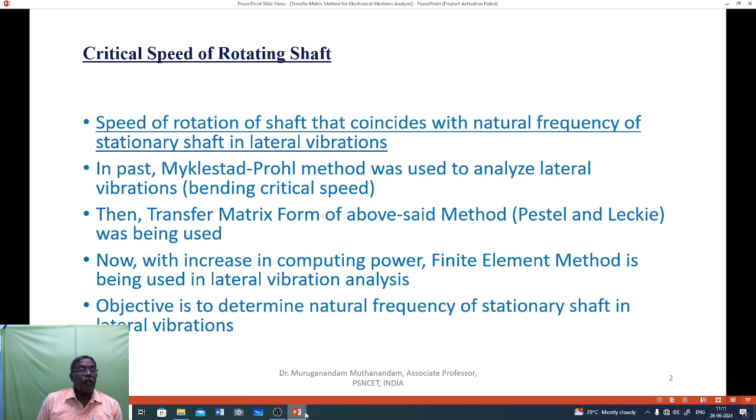What is the critical speed of rotation of a rotor? Let us take this schematic representation of a rotor where it consists of a shaft and a disc.

The disc is having a mass m and the rotor is moving with the speed of omega radian per second.

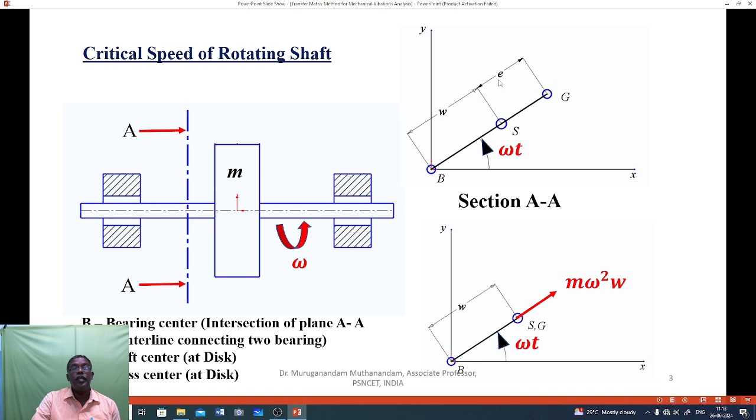The unbalance in the rotor, due to the unbalance in the rotor, the mass center of the rotor G is at an eccentric distance E from the shaft center S. The mass center of the rotor G is at a distance of E from the shaft center S.

When the rotor is in motion, there is an exciting force equal to m omega square, and W is the bending deflection of the rotor, acting on the rotor even when the mass center of the rotor coincides with the shaft center. Even in a balanced rotor, we have such a condition of exciting force. It's a varying force. When the shaft is rotating, it varies in direction.

Due to this force, the rotor is under bending deflection, bending vibrations. The rotor is at bending vibrations.

The objective of this presentation is to find out the frequency of that vibration, corresponding to the natural frequency. When this vibrational frequency equals the natural frequency of the beam under bending, the speed of rotation is called critical speed.

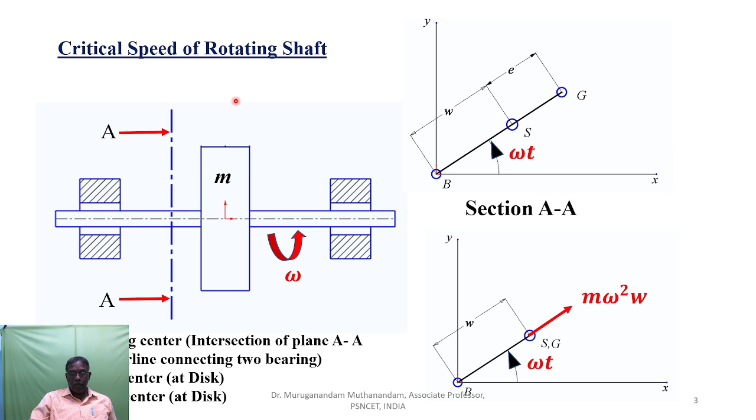In order to avoid such destructive conditions of this vibration, it is important to analyze the critical speed of the rotating shaft. So the critical speed is the speed of rotation of the shaft which coincides with the natural frequency of the stationary shaft in lateral vibrations.

In the past, the Myklestad-Prohl method was used to analyze these lateral vibrations or bending critical speed. Then the transfer matrix form of the above method, developed by Pestel and Leckie, was being used. Now with the increasing computing power, finite element method is being used in lateral vibration analysis.

The objective of this presentation is to determine the natural frequency of a stationary shaft which is undergoing lateral vibrations using the transfer matrix method.

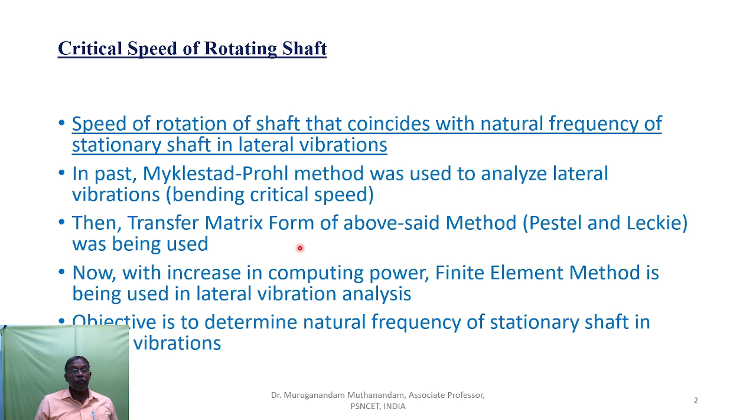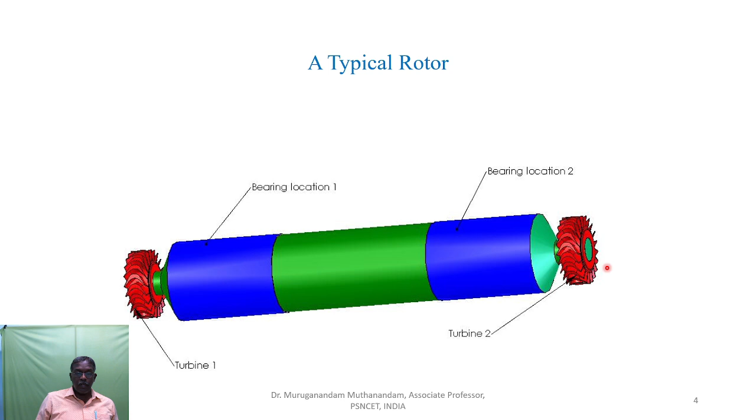This method is based on discretization of the elements. In a real rotor, the mass of the rotor can be discretized into an infinite number of elements. In that sense, a real rotor has infinite degrees of freedom of motion.

Whereas analyzing such a real rotor with an infinite number of degrees of freedom, the mathematics involved, the equations involved are very tedious, so we go for a finite number of masses in a real rotor. The mass of a real rotor is discretized into a finite number of elements.

Here the entire rotor is discretized into n number of elements, an n mass system. Each and every mass is assumed to concentrate in a location called a disk.

A disk is a turbine wheel, a ring of blades in a turbine, or a ring of impellers in a pump or a compressor, or it may be, in the case of a power transmission system, one of a number of gears. Each gear can be taken as a disk.

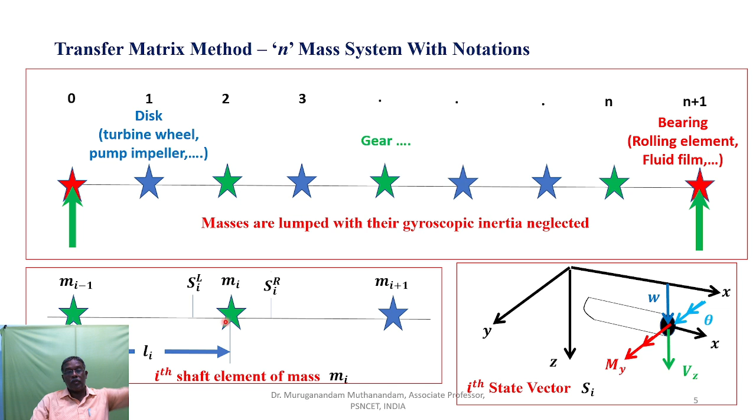The equilibrium relations are used for arriving at the governing equations for shear force and bending moment. Newton's second law of motion is applied on the elements, point masses and elastic elements, to arrive at the relations between the shear forces to the left and right side of each node, and the bending moments to the left and right side of each elastic member. Newton's second law of motion is used on these elements.

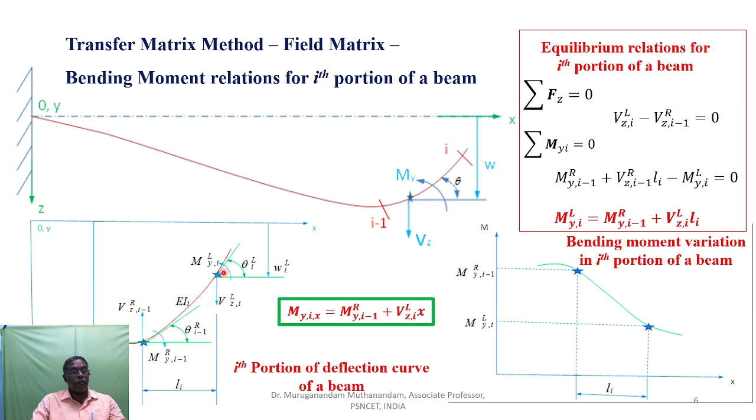This is called the first theorem of the area bending moment diagram. Using this area bending moment diagram first theorem, the slope, the change in slope of the deflection curve is obtained. Integrating this equation of deflection, elemental deflection, will lead to the change in slope over a given ith element.

The vertical distance along the z-axis from I minus 1 can be represented by I dash, which can be found by the moment of this area inside the bending moment diagram, that is area is m into dx, m is bending moment, dx is the length of that element in the bending moment diagram. So m into dx is the area of this bending moment diagram, EI is the flexural rigidity.

The moment of this area under the bending moment diagram is given by x dash into m dx. X dash is measured from the point of I towards the elemental area inside the bending moment diagram. So the first moment of this area under the bending moment diagram divided by flexural rigidity will be equal to x dash d theta, which is nothing but the vertical distance along the z-axis of I dash, which is equal to the change in the deflection from I minus 1 to I.

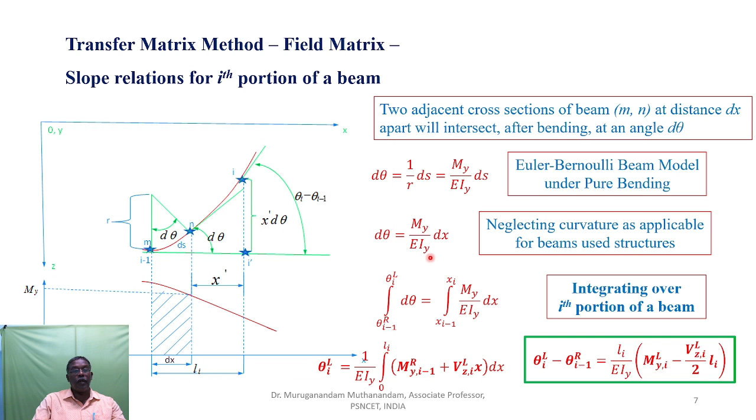Here, the change in deflection x dash d theta, or the vertical distance from I and I minus 1, is given by the first moment of this area under the bending moment diagram divided by flexural rigidity, which is called area bending moment second theorem.

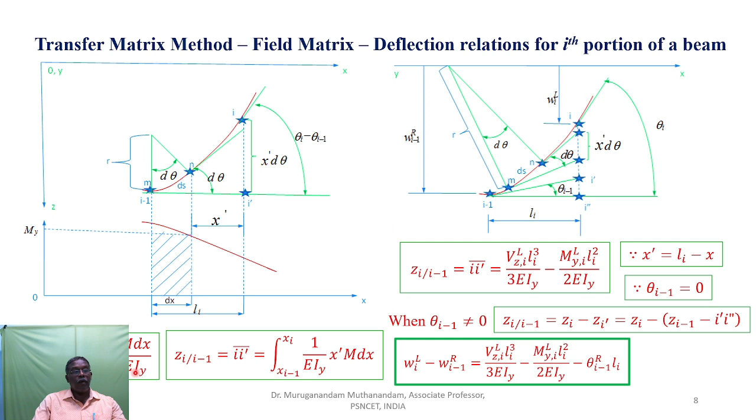Using the area bending moment first theorem, the equation for slope is obtained. Using the area bending moment theorem 2, the equation for the deflection is obtained.

These 4 algebraic equations can be rewritten in the form of matrices, where the matrix of vectors of the ith element is related to the matrix of vectors of the I minus 1th element.

That is, the state to the left side of ith element is related to the state of the node to the right side of I minus 1th element, using the coefficient matrix, which consists of constants such as length of the element and flexural rigidity of the rotor.

So in abbreviated form, the ith state vector to the left side of the ith element is related to the state vector I minus 1 to the right side of I minus 1, using the field matrix Fi. The field matrix is a matrix of coefficients which are defined by the elastic and stiffness properties of the materials such as L, E and I.

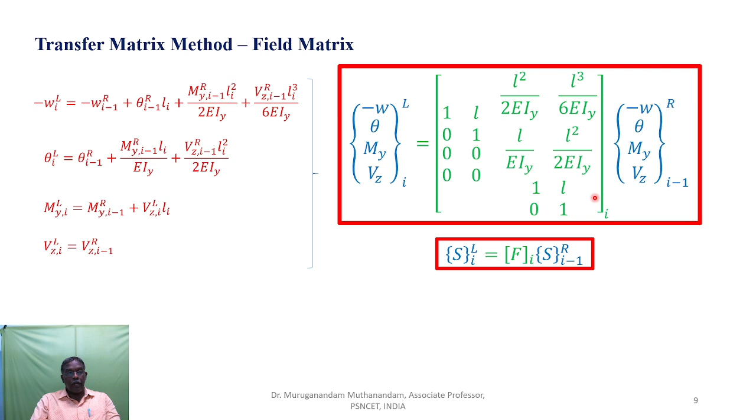For the point mass, we can arrive at the matrices called point matrix using the equilibrium relations for the ith point location of a beam, where the shear force is acting vertically downwards and bending moment is acting anti-clockwise. These are the positive directions for the shear force and bending moment.

Using Newton's second law of motion, the equations for shear force and bending moment are arrived. Using the area moment theorem 1, the relation for theta is arrived. Using the area moment theorem 2, the equation for deflection W is arrived.

Thereby, we can relate the state vector of the ith point mass to the right of the ith point mass with the state vector to the left of the ith point mass using a matrix called the point matrix, which consists only of inertial properties of the rotor, such as mass of the rotor and P, which is called the natural frequency of rotation of the shaft, or natural frequency of bending of a stationary beam.

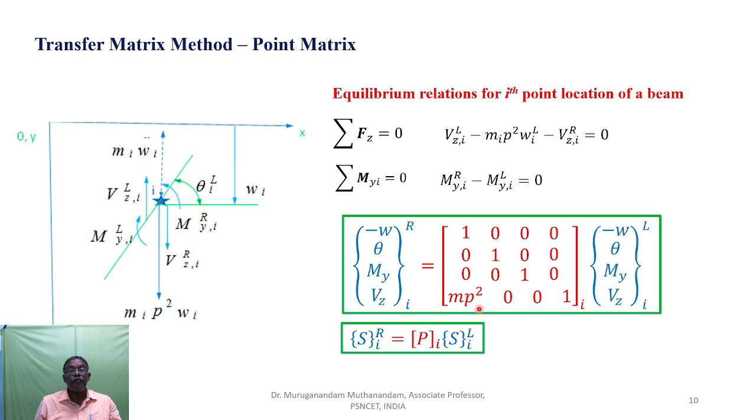The shaft is made of steel with a Young's modulus of 2.0682 into 10 to the power 11 Newton per meter square. The total mass of the rotor including the shaft is 51.8 kilogram.

The shaft mass is lumped at the disc location 2. Point 1 is the location, that is the overhang left end of the shaft. Point 3 is the overhang right end of the shaft. Point 2 is the disc location.

Point A and B are the locations of bearings. At these bearing locations, there are reactions PA and PB acting upwards.

At the location of node 2, there is a vertical downward force equal to the weight of the rotor, acting as 508.2 Newton, corresponding to 51.8 kilogram mass of the rotor.

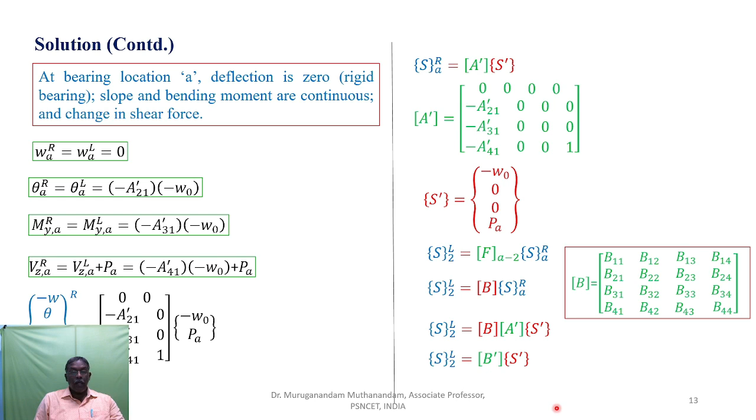The state vector of A is obtained by multiplying the field matrix of the element 1 to A with the state vector of the first node, that is the previous node. As you can see here, the state vector of node A is obtained by multiplying the field matrix between these nodes 1 and A with the state vector of node 1.

The state vector of 2 is obtained by multiplying the field matrix of the element A2 with the state vector of A. Similarly, by multiplying the field matrix of 2B with the state vector of 2, the state vector of B can be obtained. By multiplying the field matrix of element B3 with the state vector of B, the state vector at 3 is obtained. So thus the state vector of each and every successive node is obtained by multiplying the field matrices of that element with the state vector of the immediately previous node.

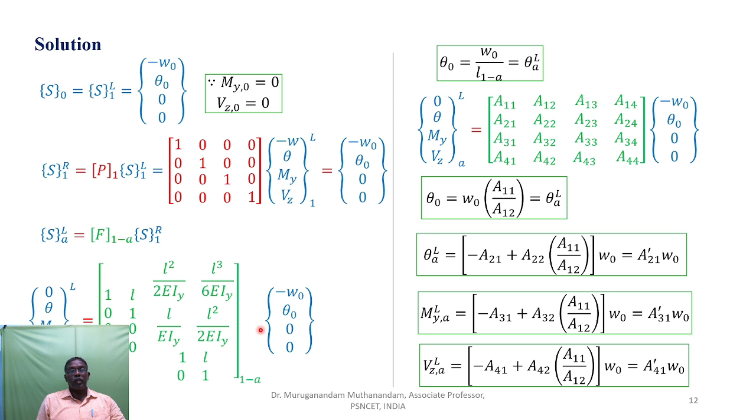By continuing in this way, at the bearing location B, deflection is 0 again due to the rigid bearing conditions, and the slope and bending moment are continuous. There is a change in the shear force due to the reaction force PB, thereby there is a change in the shear force VZB with respect to VZB of the left side of the node B.

Using the conditions that the deflection of node B is 0, there is a continuous distribution of slope, theta B right is equal to theta B left, bending moment is continuous, MYB right is equal to MYB left. We obtain the equations of E dash U and E double dash.

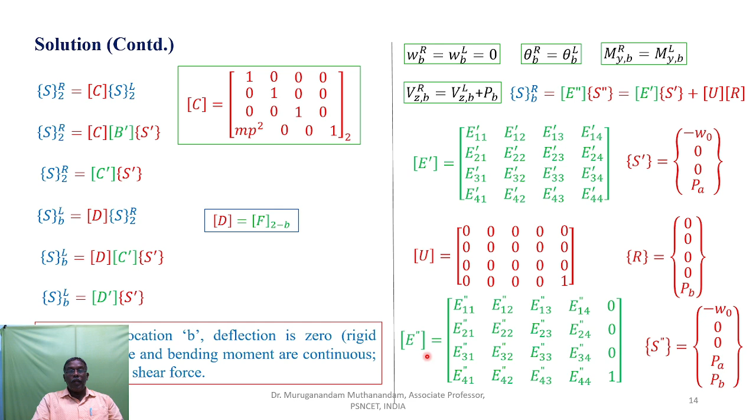Finally, we obtain the state vector of 3 to the left side of 3 with respect to the state vector of B to the right side of B using the matrix G, where G is obtained from the field matrix B to 3. In this way, we obtain the final four equations which define the state vectors of node 3 in terms of deflection at node 3, slope at node 3, bending moment at node 3, and shear force at node 3.

Here the boundary conditions are such that bending moment and shear force are 0 due to the free end conditions. At point 3, bending moment is 0, shear force is 0. At point 1 also bending moment is 0, shear force is 0. At point A, in the bearing location, deflection is 0.

Bending moment and slope are continuous. At point B also, deflection is 0. Bending moment and slope are continuous, though there is a change in the shear force. Here there is a change in shear force at A also due to the action of PA, and there is a change in the shear force due to the action of PB.

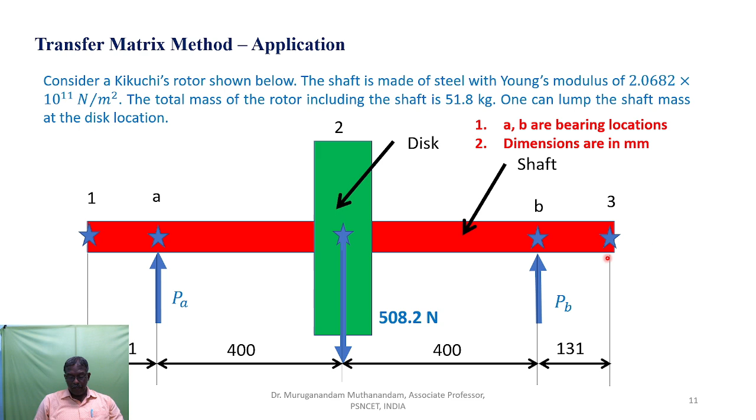We arrive at the E double prime equation, which leads to this equation in terms of T31, T34, T35, T41, T44, T45, E11 prime, E14 prime, etc., where W0 is the deflection at node 0, that is point node 1, and Pa is the reaction force at bearing A, and the reaction force at bearing B.

We obtain a system of linear algebraic equations. Again, these equations are homogeneous equations; the right hand side is 0. For the condition that W0 should not be equal to 0, PA should not be equal to 0, and PB should not be equal to 0, only then is the given physical situation validated. For the given physical phenomena where the beam is under lateral bending conditions, these should not be equal to 0. If they should not be equal to 0, the determinant of this matrix given by G should be equal to 0.

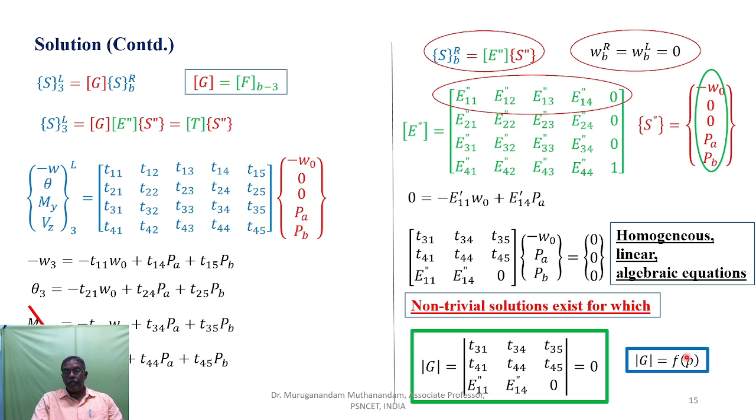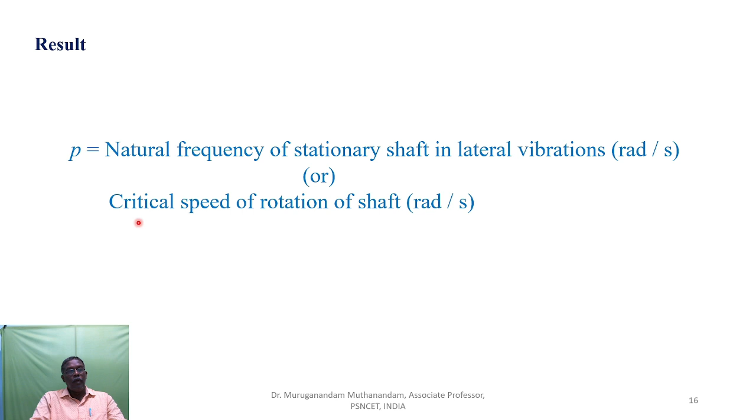Using this condition, we can arrive at a function f of P equal to 0, where P is the natural frequency of the beam under pure bending conditions. By solving this equation, that is setting the determinant of this matrix equal to 0, we arrive at an algebraic equation in terms of P, which can be solved for P. Thereby, the natural frequency of the stationary shaft in lateral vibrations can be found, which is equal to the critical speed of rotation of the shaft.